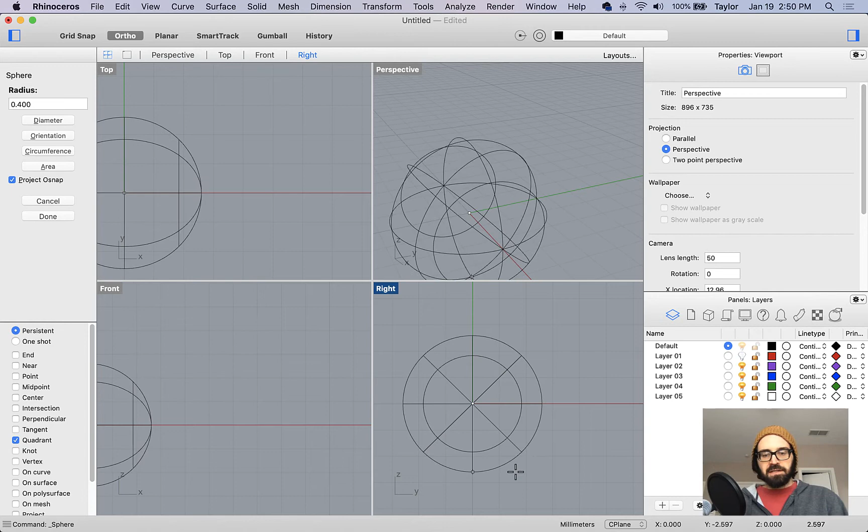Okay, so let's come in from the right-hand side. I will grab my sphere tool, sphere from the center and the radius, hit 0 to anchor myself there, and then we'll just make the duck yay big. So in this particular case, what really matters is proportion as opposed to specific numbers. I'll right-click to repeat the previous command and repeat the sphere. And then my second sphere will be about here, maybe a little bit smaller, kind of sticking out in front of the first one a little bit.

So if I look here from the top, I actually want these two to be in line. So they are in line here, but not in the right view. So maybe I should have made these in the right view. Oh no, that's correct. Okay, so now the duck is sort of facing up the green y-axis. Okay, back to Firefox. Okay, let's see here.

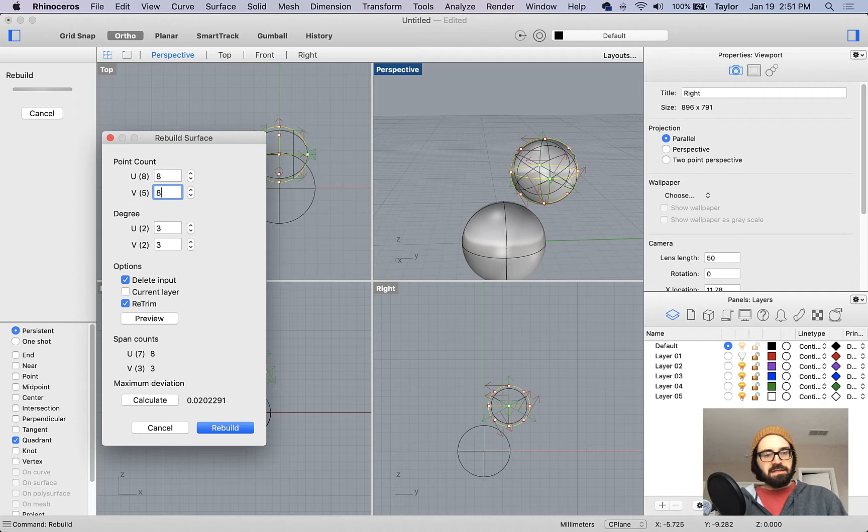Now, we're going to take these spheres and make them deformable through a process called rebuild. And it wants us to add in the degrees and make them 3 and 3 for the U and V. And the point count should be 8 and 8. So let's go ahead and do that. So rebuild. You might be able to do these both at once. We want this to be 8, 8, and 3 and 3. And then I'll say rebuild.

And now you can see there's more of these iso curves that are defining the shape of the sphere as compared to this one down here, which has fewer. I'll hit enter to repeat the previous command, and we like the settings as they are. So I'll go ahead and hit rebuild. And one of the things I want to verify here is that the direction of the rebuild looks the same. So you can see these circles radiating out from the center in the front viewport.

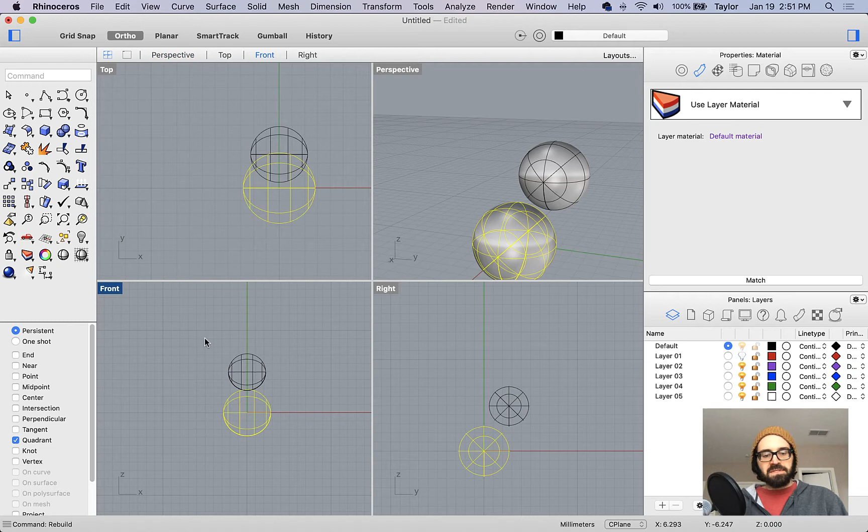And when I switch back to Rhino, my front is actually at an angle. So I could fix this if I wanted to by coming down on the top view and picking rotate, setting 0 as the axis of rotation, coming out here to the right, and then flopping this 90 degrees. It automatically went to 90, deleting the old one, because I had ortho selected. So I'm just making sure that my screen looks exactly like the tutorial screen, so now the front should look like this, and indeed the front looks like that. Or I could have just paid attention and set it up correctly the first time.

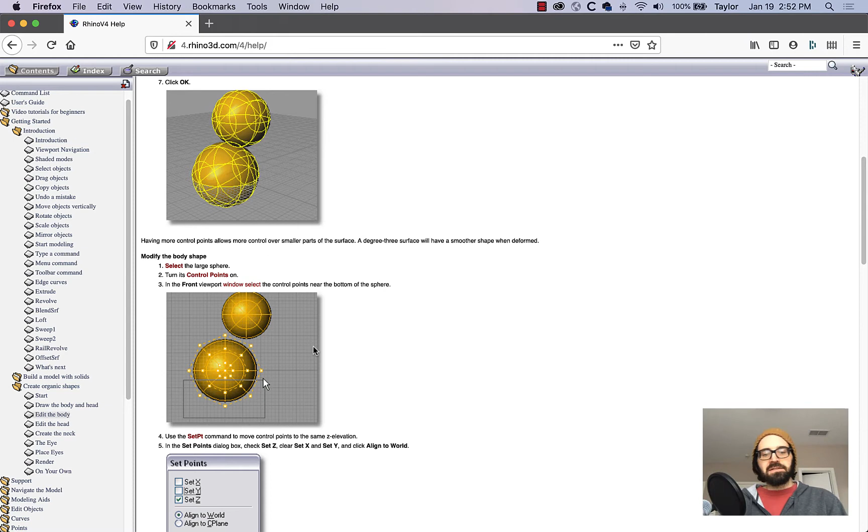Okay, now to modify the body shape, we want to reveal the control points that are making up this sphere. So think about control points kind of like little planets that are exerting gravitational force on an object, and as you move those planets further away, they pull the shape into a kind of distortion, and as you move them closer, they can dimple or indent that shape. They're also having us drag a selection box of these points from left to right along the bottom.

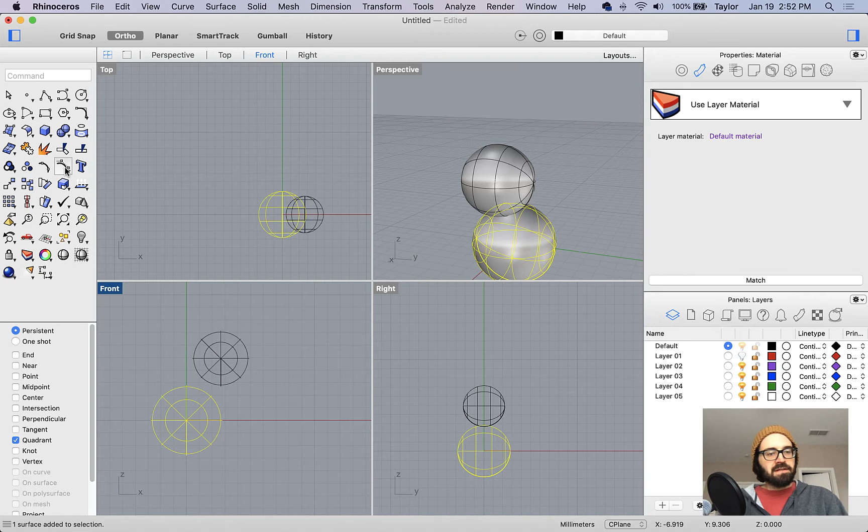So let's see, control points on. Let's go do that first. So I can start typing in control points. I might just do this with a button. Let's use this one right here. So this is control points on. And then I will select all of these right here. So you'll see it's the 6 that are at the bottom, and I'm not touching that central area with those points. Okay, so I get those. And then if I look in from the side, I can see that I selected some control points all the way across that were hidden from my view when I selected in the front view.

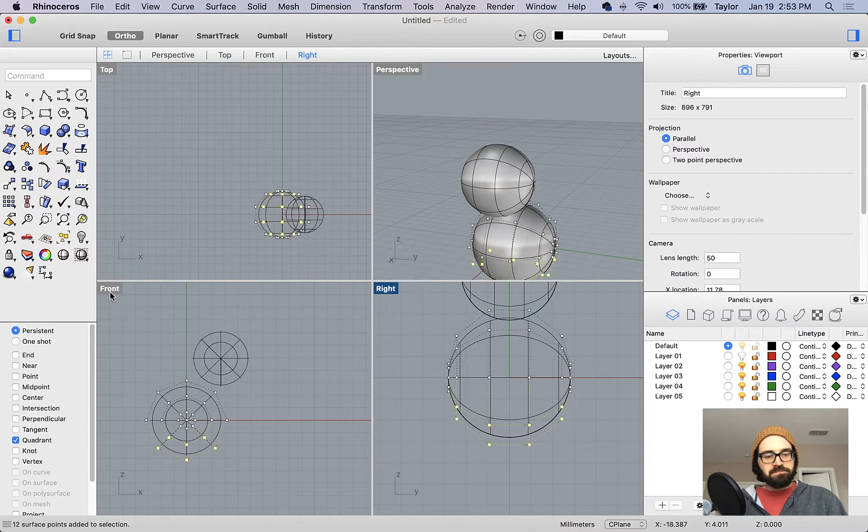Okay, now it has us doing the set point command, and we want to set Z and align to world. So let's try that out. Front view, SetPt. We're just worried about moving in Z, align to world. And now I can kind of move these up and down until I flatten my duck's body out. Maybe I'll turn on grid snap for this.

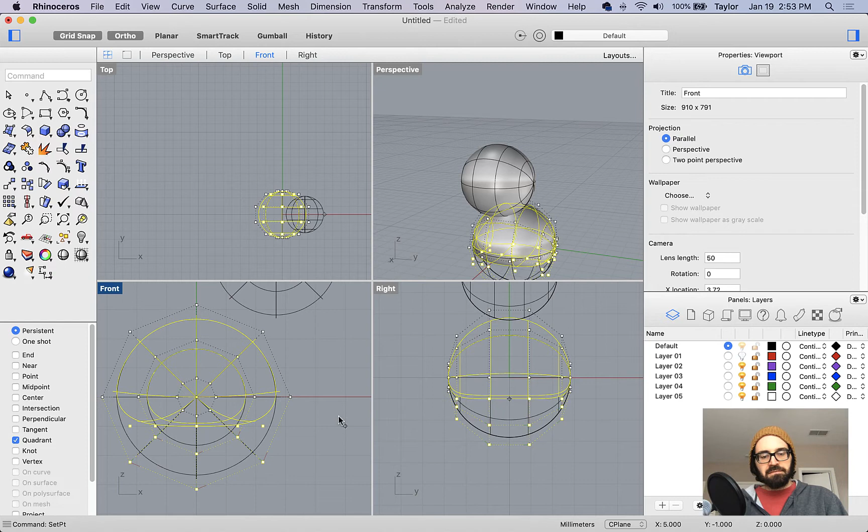So going all the way up to 0 is a little bit too much. You see I get these weird deformations, so I might do something more like that. Okay, so that gives us a little kind of flat but not too distorted and weird looking bottom for our duck to sit on.

Okay, now it's having us come in and drag the tail out. So let's come in again from the side. And sometimes this will take a little bit of experimentation, so maybe I can try selecting these 2 points all the way through and just dragging those around with my mouse. I'll need to turn ortho off for this so I have a little bit more freedom. So maybe I want that tail to be sort of up at a jaunty angle.

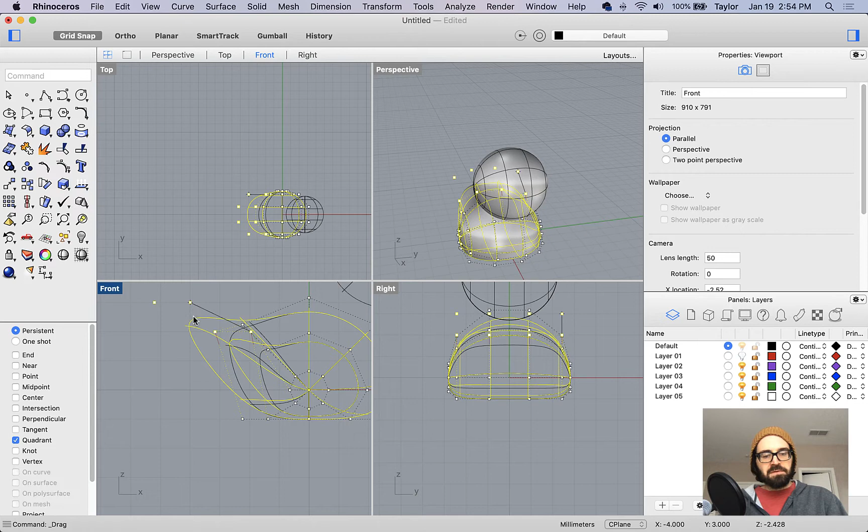And as I rotate around the duck, I can see if I'm causing any weird pinches or other structures like that. And that's looking pretty good to me. You know, maybe I would come in and individually move points around if I don't want this thing to be so symmetrical, but I'm going to stick to symmetrical for right now.

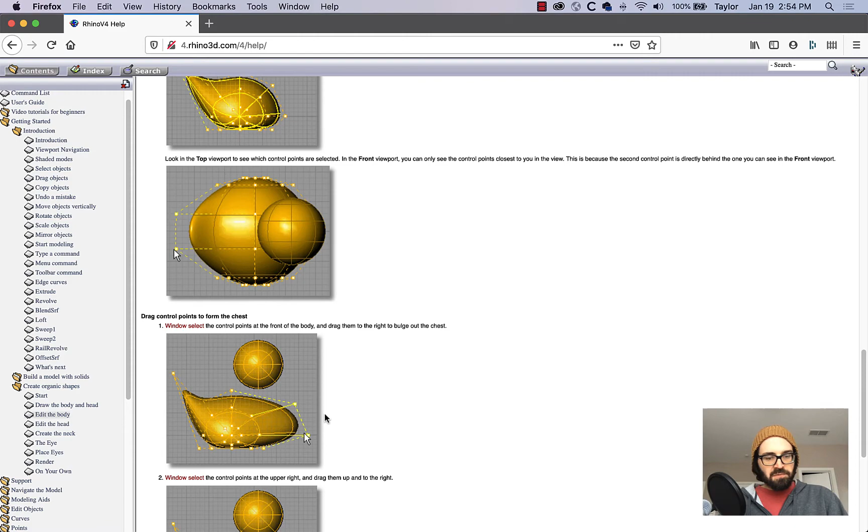Okay, drag the control points for the chest, so we're getting the chest kind of rounded out, making this guy a little more boxy. So let's come in here and say, maybe I'll select this group and kind of pull this out like that. Yeah, I think that looks pretty good. So I'm coming in from the side and looking around.

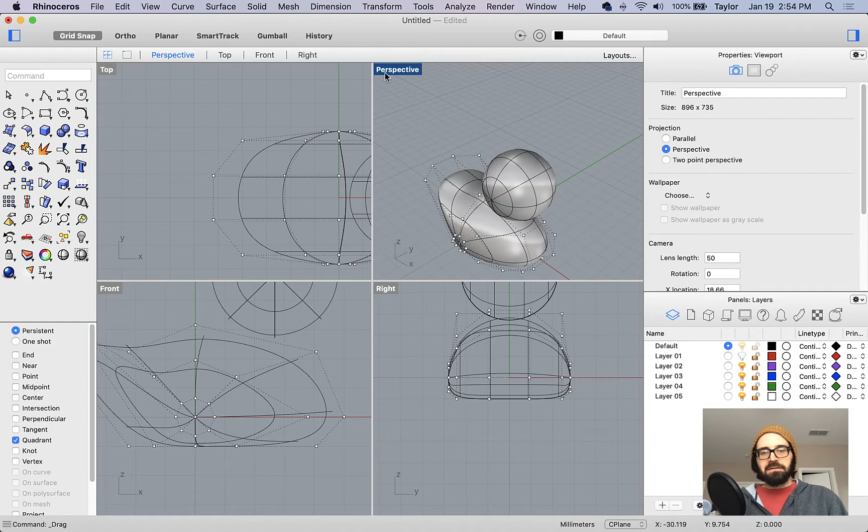Sometimes the shaded viewport can make it a little hard to tell what's going on, so you could switch this over to rendered, which is also a little bit hard to read, but I think that's actually pretty good for showing us what's happening. Okay, so our duck is taking shape. And then it says press the escape key repeatedly until the points turn off. Sometimes you have to do it more than once.

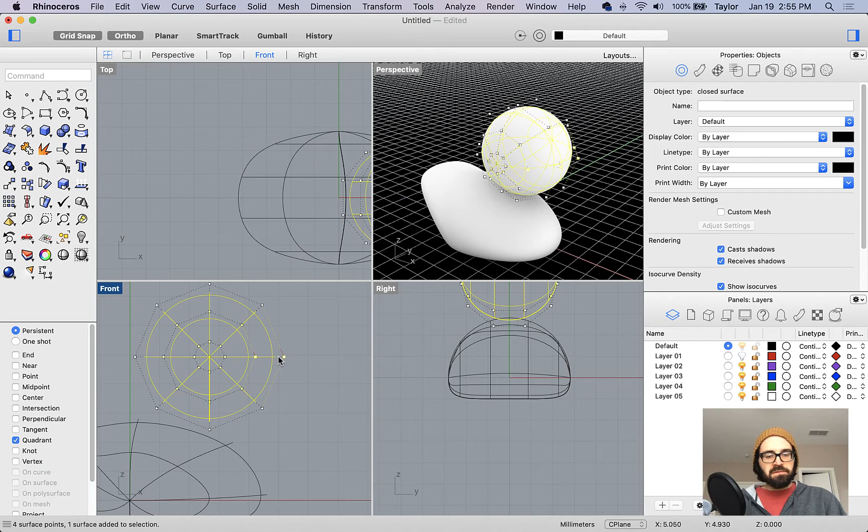Okay, next up. Now we're going to make the beak, kind of the same thing as before. So I select this circle, I turn on my points right here. I'm just going to pick a couple to pull straight out, so I might want to turn ortho on to help me with that, and have my duck's face look something like this.

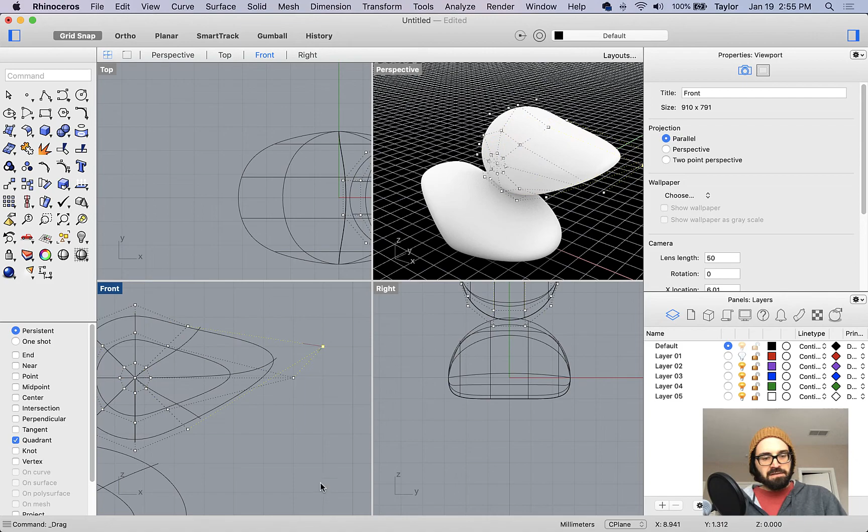It also has it pull up at a little bit of an angle, so now I'll turn ortho off and maybe just pull it up like that, or for example I could just reselect just the front points, so I can make this a little more articulated. Good. So, you know, we're making stuff on the computer, we want to make sure it doesn't look too digitized and too regular. Do something like that.

All right, cool. So now we start getting in here to separate our features out. We're going to separate the bill, or I guess what I was calling the beak, from the head. We'll start doing that by creating an interpolate point curve. So up here, I think that's a control point curve. So if I open up the menu, I get interpolate points.

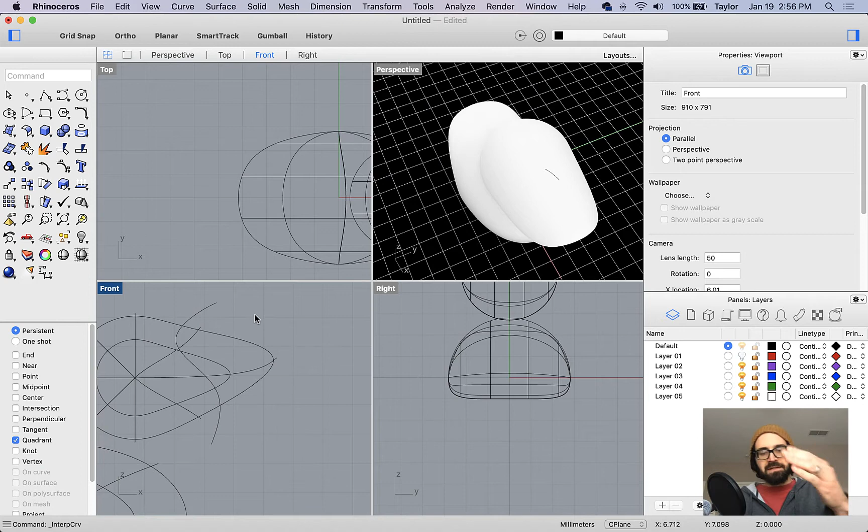And what interpolate points is going to do, I'll turn off grid snap as well, is I just sort of click around and then I get a line that's going to try to adopt. It's going to be like a bendy piece of wood that's trying to hit each of those points as it goes. Although I think the shape that we want is actually kind of the opposite of what I just made.

So let's see here. I'll delete that, redo the interpolate points command, and it kind of comes in and then goes out at the bottom. Okay, cool. So we'll do something like this. And, you know, this may take some experimentation to get this right, so I'm just going to do it however it goes, and then you can take the time to make yours absolutely perfect.

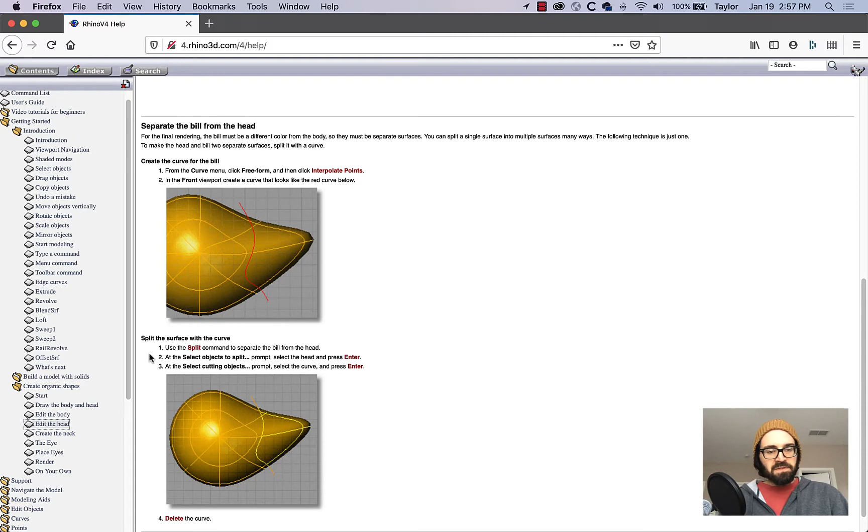Okay, we want to split the surface with the curve. So there's trim and split. Trim will delete one of the sides, whereas split just breaks something in half. So let's type in split. Objects to split are the head. Cutting objects are the line.

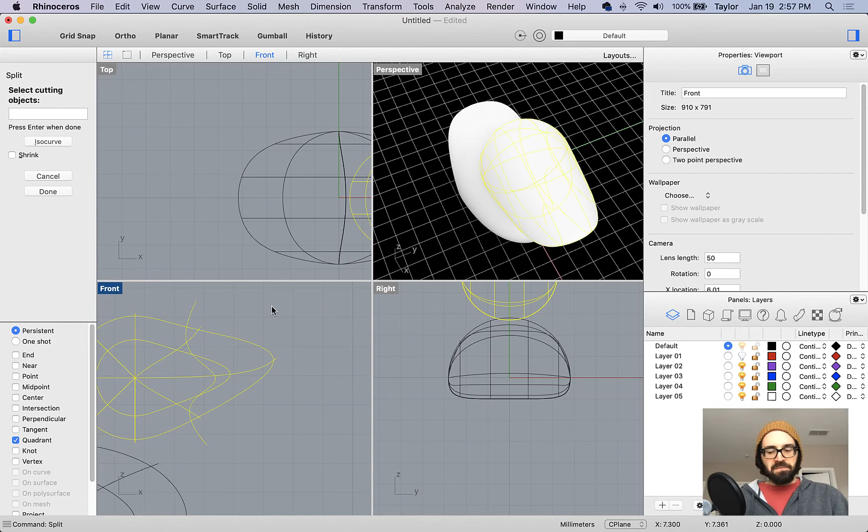And because I'm in the front view, it's understood that the line is going to project all the way through the beak, even though it's just like a piece of string. And I'll hit enter, and down here at the bottom I see split into 2 pieces. And I should be able to select these individually at this point. Cool. Now, if you don't like how your shape looks, take the time to go back and make it look better, but I'm going to stick with that one for now because this is just a demo.

Okay, next up. Now we want to model the neck, so this will involve, if I'm not mistaken, doing a trim, which I mentioned a moment ago, and we'll do that with a cut plane.

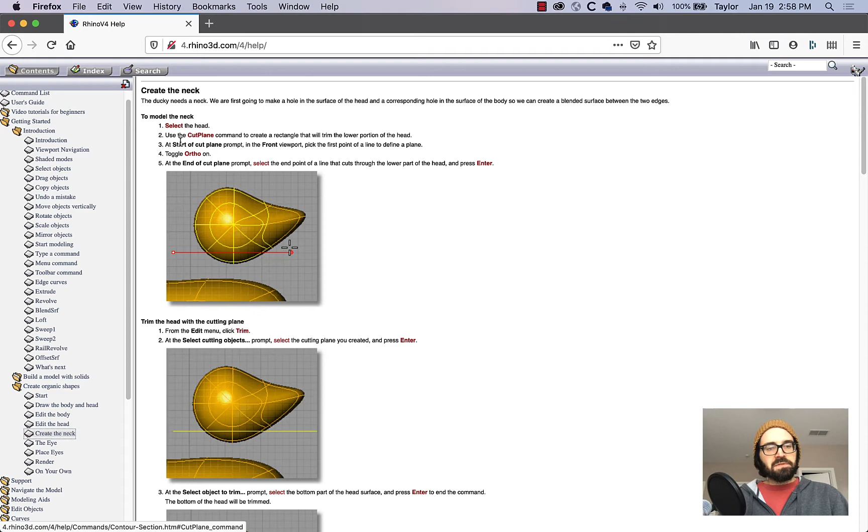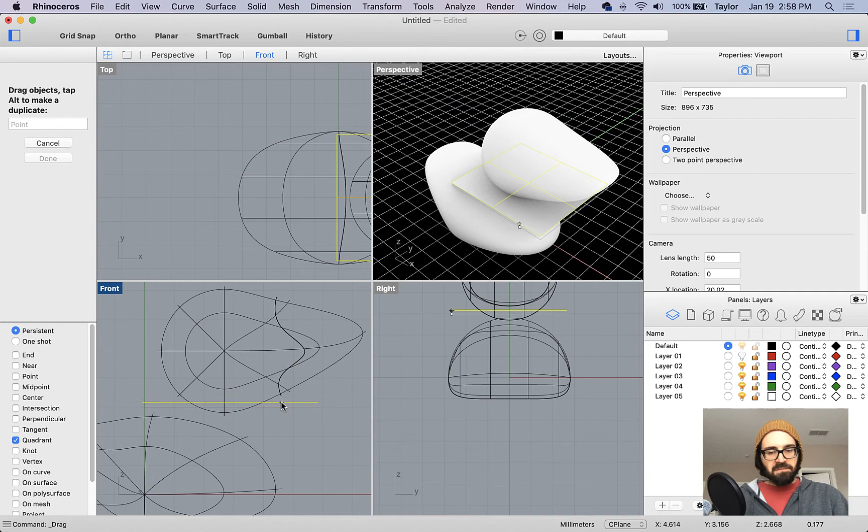Okay, so come in through the front, type in cut plane, and we're going to make a straight line across the bottom. I'm just holding down shift, but you can do this with ortho as well, and that will automatically make a plane that's the right size to accomplish this cut. And hit enter. I might scooch this up just a little bit, but I want to make sure it doesn't impact the place where the beak is separated from the head. So I get something like that.

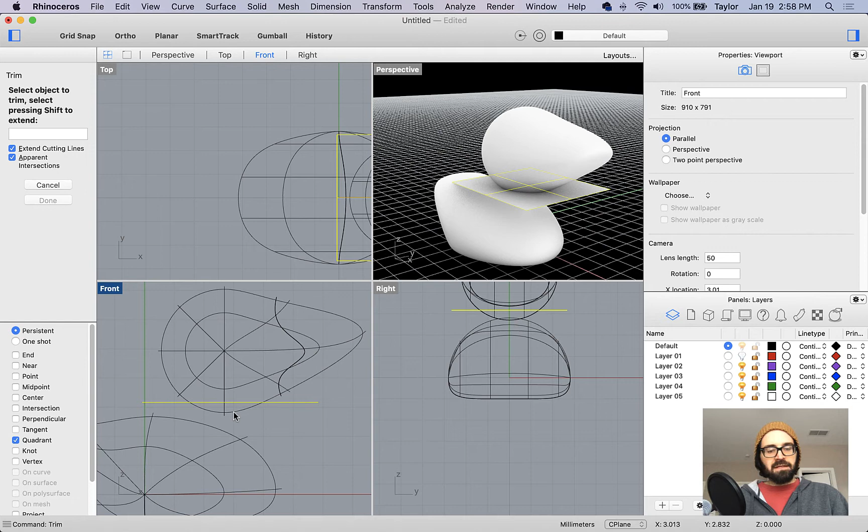Okay, we head back to here, and then we see we're going to select trim and use trim to lop off the bottom of the head. Type in trim. My cutting object is my cutting plane, and then right click or enter, and then this is the part to be cut. Now sometimes when you do this, because of the way that the sphere is broken up into parts, you have to do it more than once.

So you want to make sure to delete all of that extra geometry so that nothing falls beneath that cutting plane, and hit enter, and then I can just get rid of my cutting plane as well. So now I've kind of popped a hole in the bottom of this thing. Okay, so I don't know if it'll say this in the tutorial, but I think I might also move this duck head back a little bit. Yeah, so it's more solidly over the body.

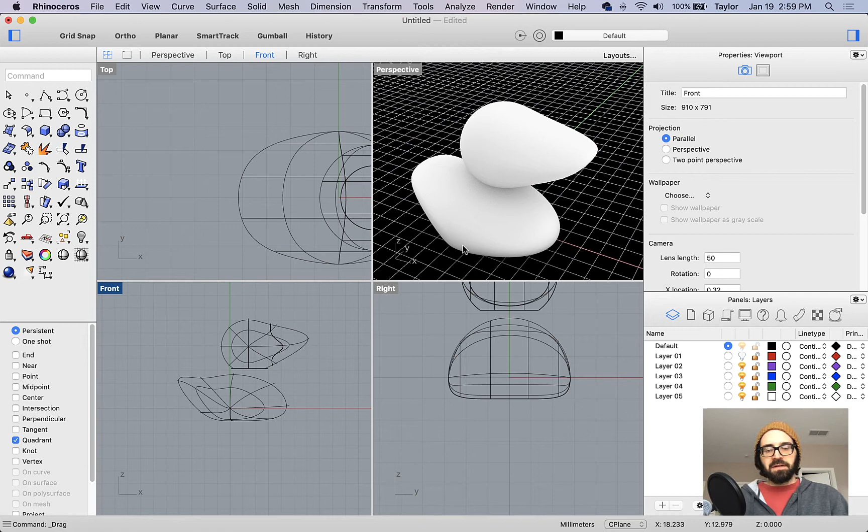Okay, cool. Now we're going to cut a hole in the body for the neck, and we'll do this with this command ExtrudeCrv, or extrude curve. And this one can get a little tricky. Here I might switch back to shaded to see what we're doing, because we need to extrude all of this curve at once as opposed to just part of it. And because the head didn't want to cut all in one piece, it's more likely to generate multiple pieces.

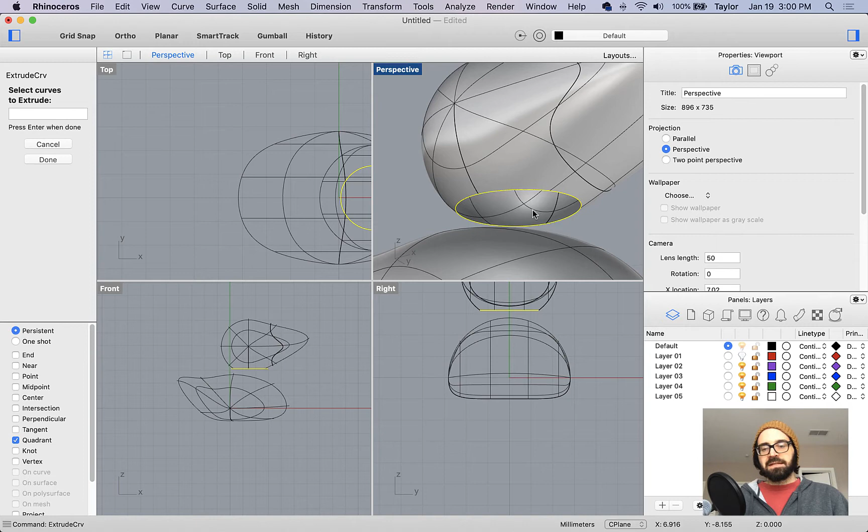So ExtrudeCrv, and when I select the curves to extrude, you see it doesn't want to give me the full neck unless I go in there and really tell it you have to do both lines. And then I hit enter or right click the mouse, and then I'll extrude that well into the body, so I'm absolutely sure that it is coming into contact all the way around its perimeter with the body. Okay, so there we go.

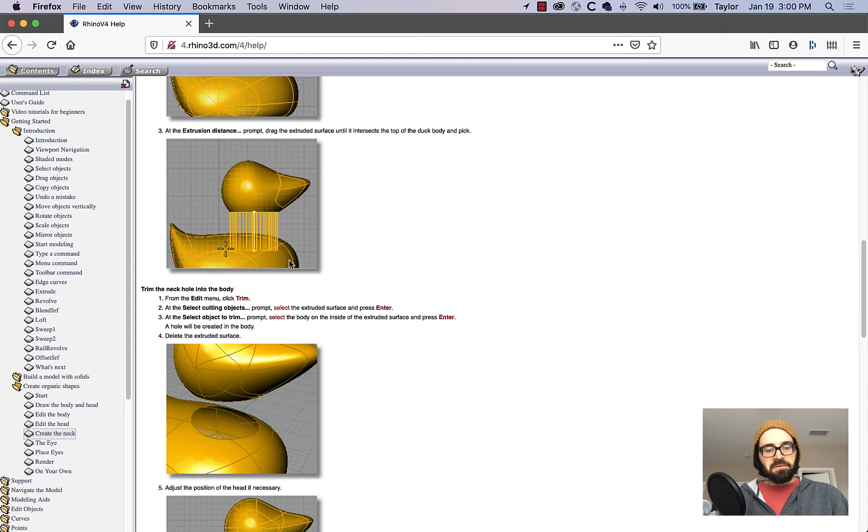We got our extrusion. Now we go back and we do another trim, and this time we will use the neck to trim a hole in the body. This can also get a little bit weird because you might have to do it more than once. So I'll switch over to ghosted view, which might help, and then I'll say trim. Actually, I like the front view for this. So the cutting object is the neck, and then the object to be cut is the body.

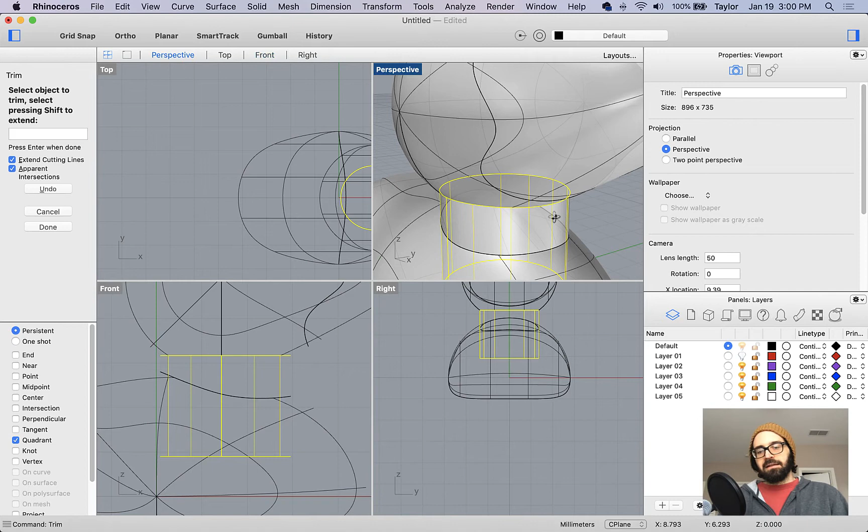And that time I got lucky, so you can see that that cut runs all the way through, and so I didn't have to do it in two pieces. So I can hit enter to finish the command, and then we're going to get rid of that extruded neck because it's too rigid, you know, it's too computery looking. We want to have more of a blended neck.

But at this point you should note that we've been working with solids up until now, but once we cut a hole in a solid, it essentially reduced it to a series of surfaces that have absolutely no physical matter. So this would not be a 3D printable object, and this will become very important later. We always need to restore surfaces to solid objects in order to have the most flexibility when working with them.

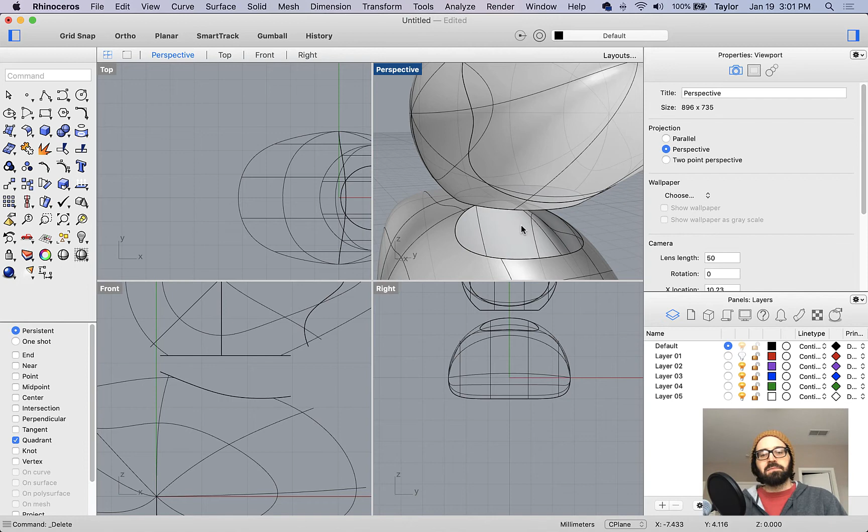Okay, let's see. So now we're going to make the duck's neck, and we're going to use blend surf, or BlendSrf.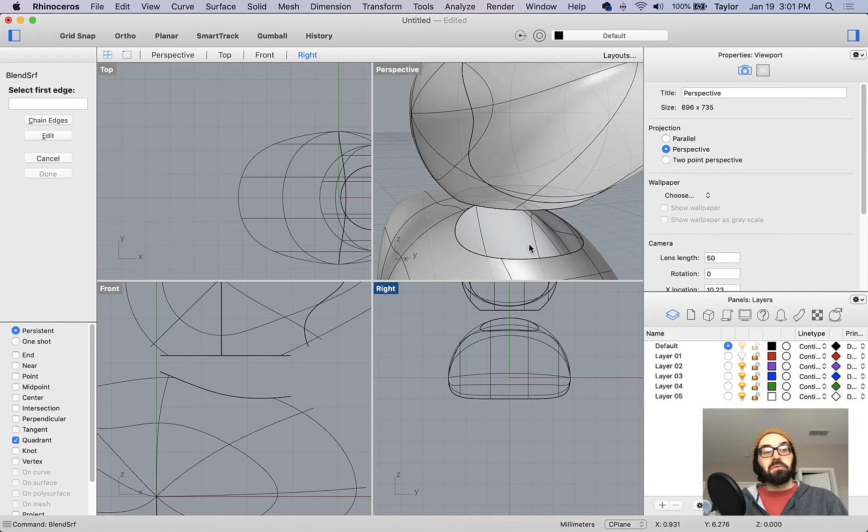In BlendSrf, you'll notice as I'm entering these commands, I'm constantly changing my view and rotating it to make the clearest indication to the computer what I want. So the first edge in this case is going to be the lower neck. That one selects in one piece. That's great, and it understands that now we're moving right on to the second edge.

So I'll click here, but I'll need to click twice. Oh, it's having some trouble with that. I might need to start on the top. So I'll hit cancel, enter to repeat the command.

Okay, so select first edge. I'm going to check chain edges so that it understands that the edges I've selected, one right after the other, are still part of part one. Okay, now I hit enter. Oh man, see, sometimes you've got to do these a couple times to really figure it out.

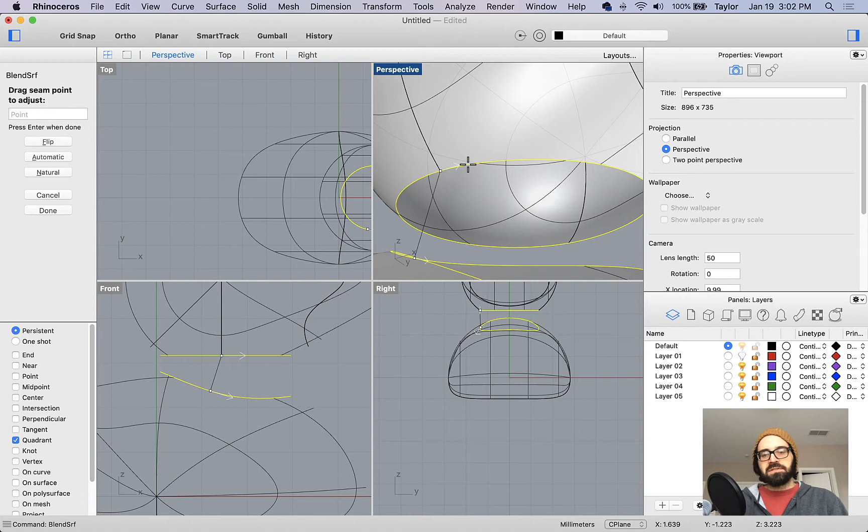Okay, first edge, chain edges is checked. 1, 2. Now it's understanding that we need to move on to the second edge, so I'll click down here. And then it gives me a sense of the direction you want these lines to be moving in, and if they're not, you can drag those arrows around. So now I'll hit enter.

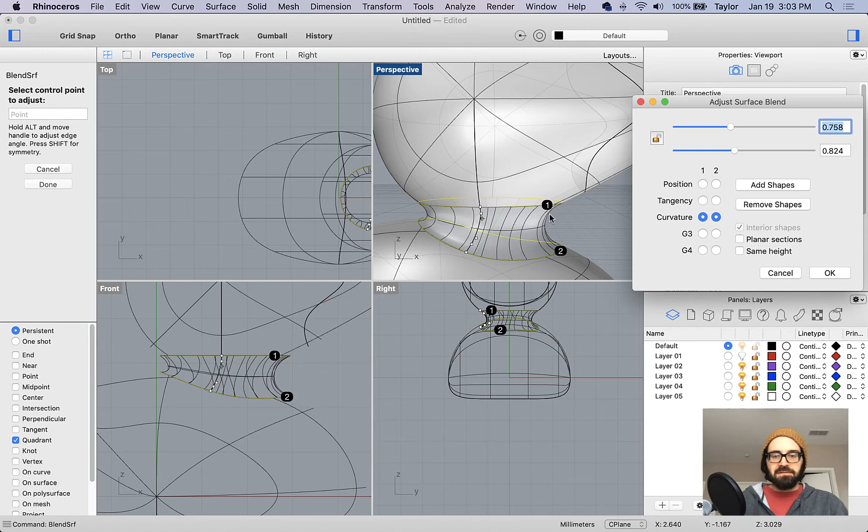If I move this window open, now you can see my blend starting to take place. The computer is interpolating where the surface was heading from the top, where it was heading from the bottom, and then blends them together. You can mess around with all these and make the different features more or less aggressive. I'm going to leave it pretty much at the default. Let's take another spin around. That's looking pretty good, so I'll hit OK.

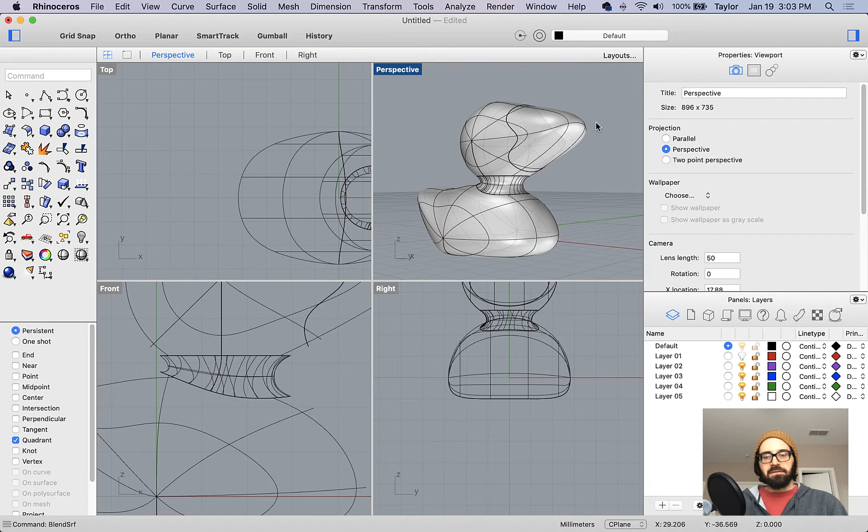So you see pretty quickly we're just starting off with two spheres, and already we have a fairly recognizable object that doesn't just look like it fell right out of a computer. I mean, it kind of does. So there's our blend, and then finally at the end it says use the join command to join together all three parts. So I select everything and say join. And if I don't get an error at the bottom, here's what you always love to see: 3 surfaces or polysurfaces joined into one closed polysurface. Closed polysurfaces are generally the thing we're trying to arrive at for the most flexibility.

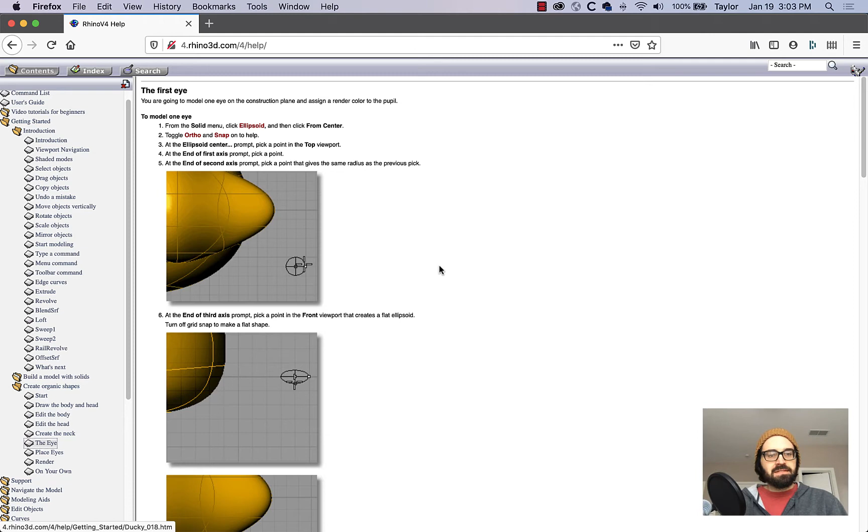Okay, now here's one that always trips up my students, so let's jump in. We're going to make an ellipsoid, and this is going to be the eyeball of the duck. We're going to do this in the top view. So I'm going to pick, instead of sphere, ellipsoid, and from center, I might put on grid snap just for kicks.

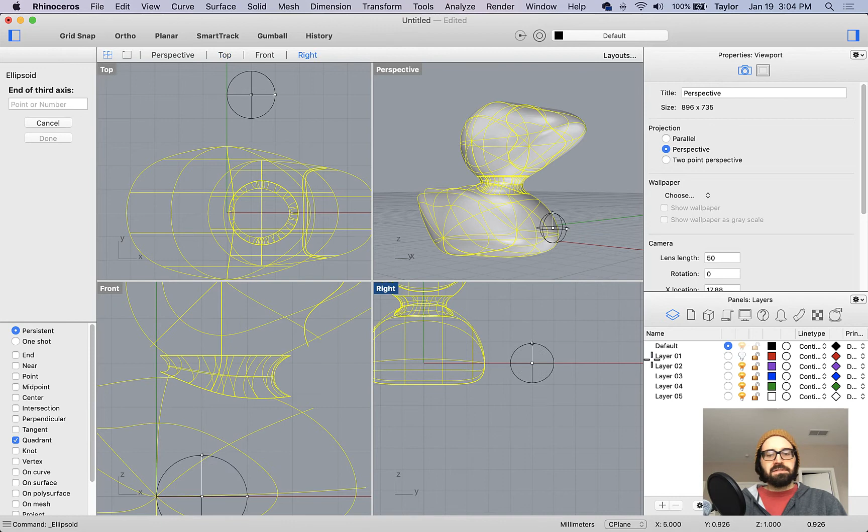So I've established its center, and then I make one dimension and the second dimension, and those should both be equal. So from the top, this thing needs to look like a circle, but then from the side we're going to kind of squash it. So I'll turn off grid snap, and I can get something like that.

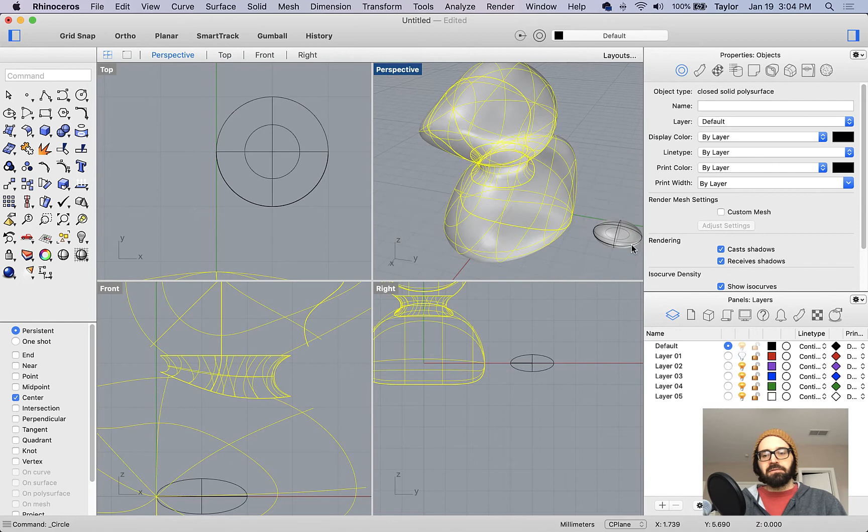So there's my eyeball. Okay, next up we want to make a pupil on that eyeball. So I will grab my center O-snap, find the edge, and then you can just kind of do this visually depending on how big you think you want that eyeball to look. So that's just a line, which we call a curve in Rhino. And now I will say split, although I may have to project it onto that surface. So the cutting object is this guy.

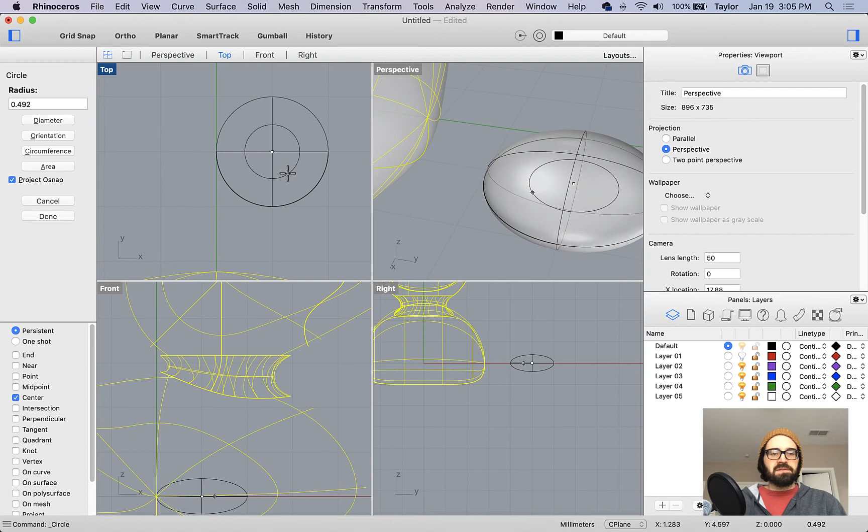Yeah, I will have to project it. Okay, let me back up and do that a different way. So I've got my ellipsoid down here on the ground. I'm going to add a circle using my center O-snap. This will be the pupil of the eye.

And then I'll take that pupil line and I'll say project. I select the surfaces to project onto, and if you watch carefully in the perspective view, you can see that now that flat circle has been projected all the way up onto the top and bottom surfaces of the eyeball. And we really just need one, so we can just delete the other two.

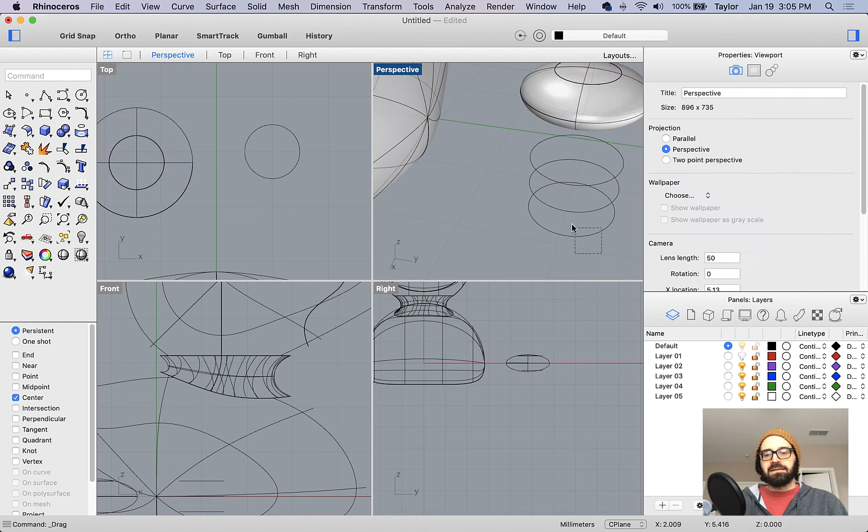Because now when I say split, I can say the object to split is the ellipsoid, and then the splitting object is the curve. And now I've got two nice surfaces here that I can render as different colors. In fact, I'll shift select them, move them off to the side, and then delete these lines right here because I don't need them right now.

Okay, so now I take this thing and group it together. We've gone ahead a bit in the instructions, so we already did our pupil. Now it's time to add in some colors. We covered this in the flashlight tutorial, but let's talk about it again real quick. Let me ungroup this.

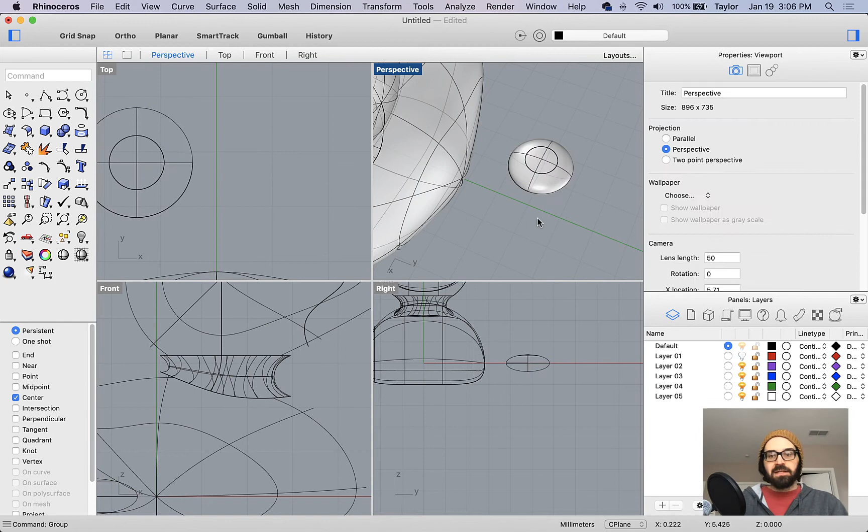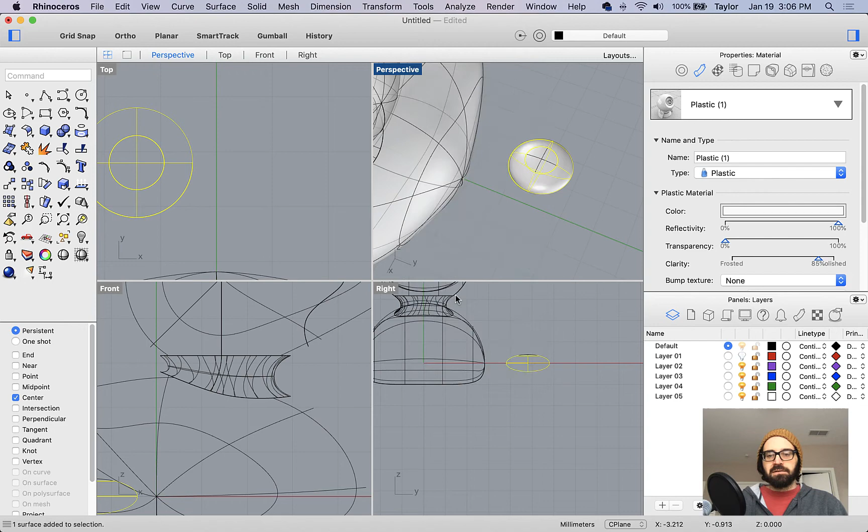I'll select one of the objects and grab its material. This may look a little different on PC, but you should be able to find it. We want to make a new material. I happen to have a white plastic already, so I'll go ahead and pick that. If I switch over to rendered, everything looks like it's being rendered in white right now.

Now let's grab the pupil and make a new black material for that. Let's call it plastic, and we'll make the color black. You can mess around with reflectivity and transparency and stuff all you want. But now we have an eyeball to mess around with, so I can regroup this.

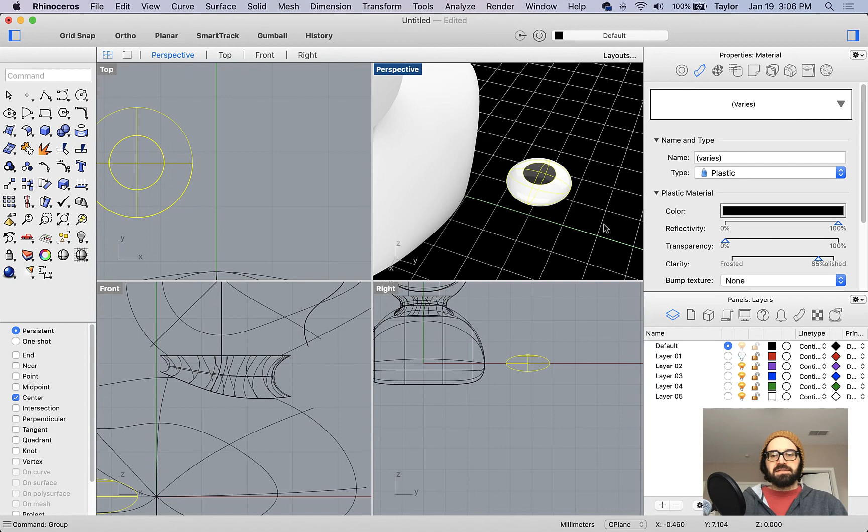You could make the duck whatever color you want. I'm actually going to explode it at this point, rendering it back into individual surfaces because I want to make some of these surfaces different colors. So I'll join back together the body, and now my beak and my body are separate. So let's make...

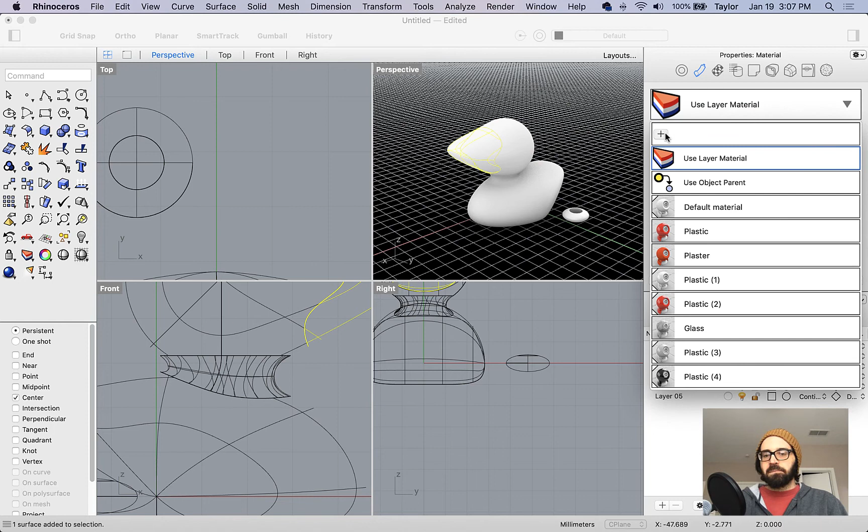Say a plastic that is orange for the beak. It's kind of nice to see it update live like that. And then you can also take a look and see, do you like how that beak is laid out? I think it looks pretty good. It's kind of a strange shape. You might make yours a little different.

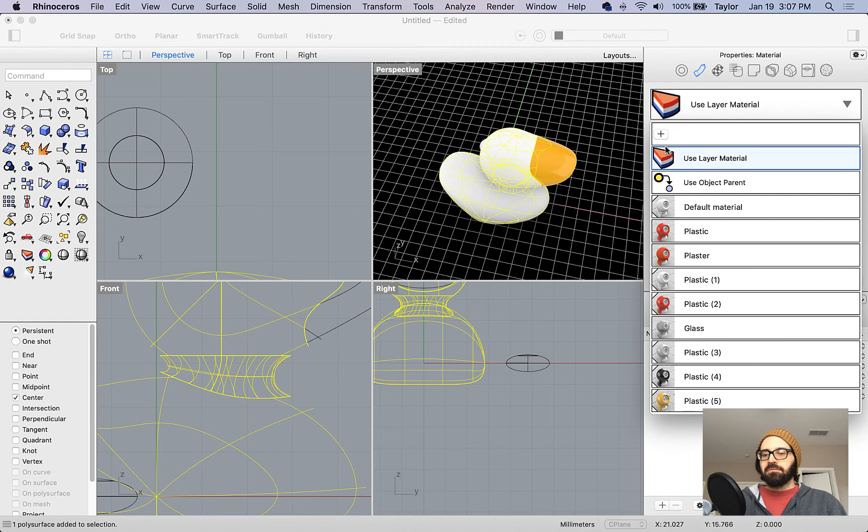And finally, we'll make one more material for plastic, and we will make that duck yellow. So again, we're going to get into some really cool, funky stuff in V-Ray that's going to let us go absolutely bananas on the rendering front. But this is just how to do some basic stuff so it doesn't just look like a stock image. That's a very shiny duck.

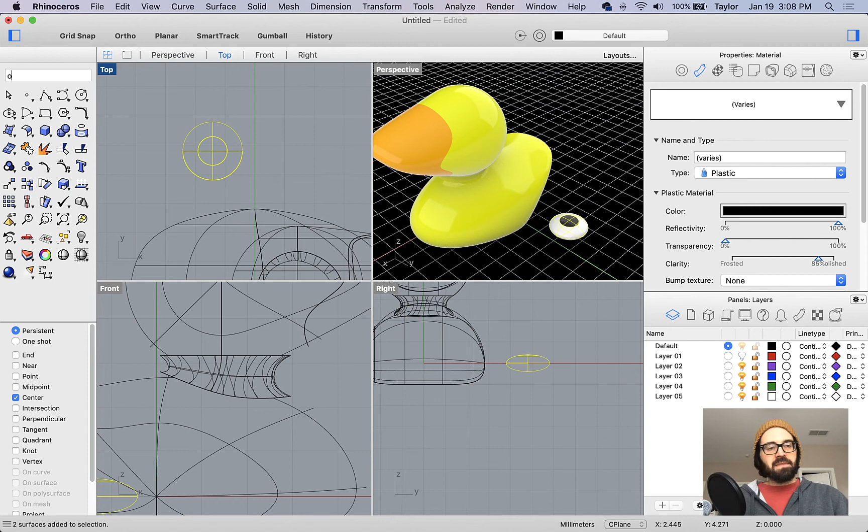Okay, so here's an interesting one. We have to figure out how to get this eyeball oriented on the surface, and this one seems to stump my students every time. Let's see if I can get it done the first time. I'm going to say orient on SRF, because we want that eyeball to land at a strange angle since the duck's head is no longer like a flashlight or something geometric.

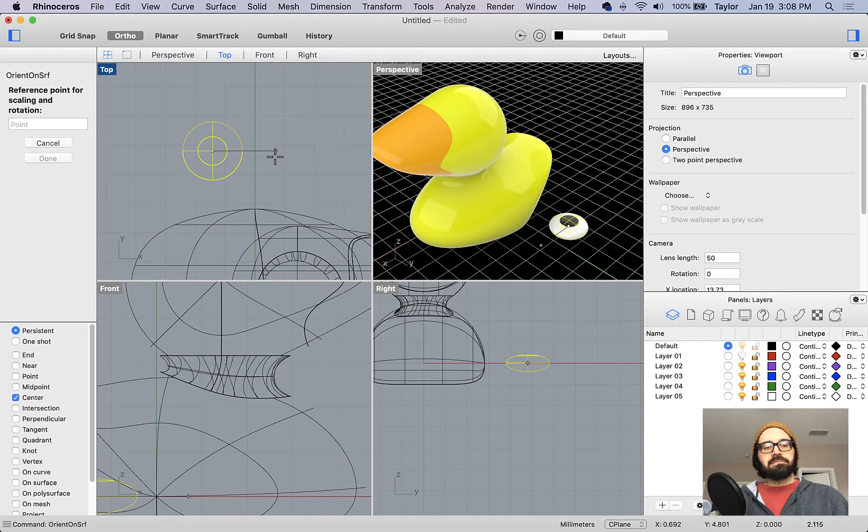The base point of orient on surface, assuming you've made your eyeball exactly as I have, is going to be the center while looking down in the top view. Then we just need to head out in any direction, really, because it's symmetrical. So I'll just check ortho and go off to the right. The surface to orient onto, I'll click on the duck's head, and it's going to ask some questions, and I'm just going to say that's fine.

And then now as I move this around, you can see that it is adopting a kind of realistic position on that head. So I don't have to do all this work rotating the thing in multiple directions to get it to stick to the head. If you wanted to, you could try to bury it a little deeper by putting your original orientation points in a slightly different place.

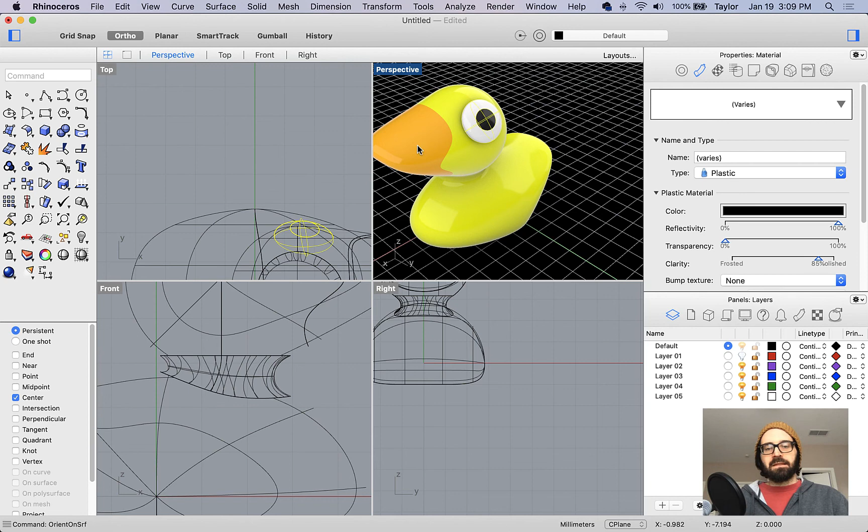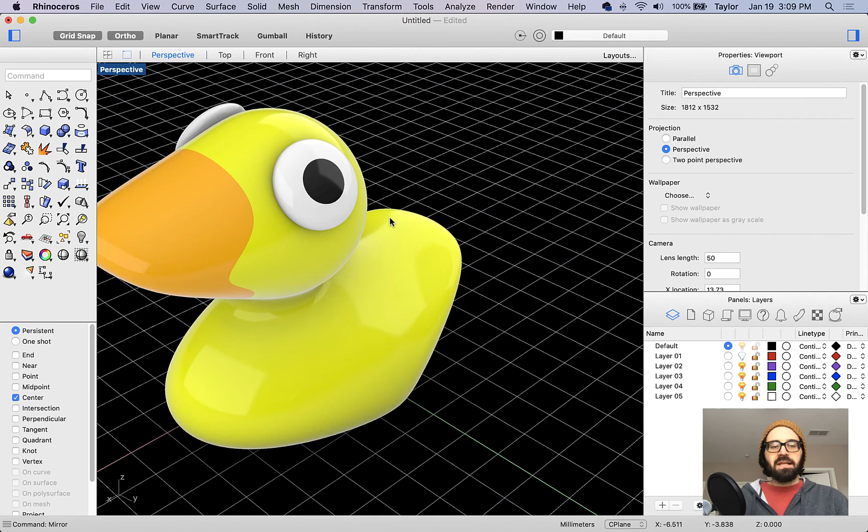But I'll go ahead and stick with this for now. Okay, and then finally I'll come up to the top and type in mirror, because I built this duck so the center is at 0 on the X and Y axis. The mirror plane, if I hit grid snap, is just starting at 0 and coming off to the right or left. I have copy checked, so I'll left click there again, and then I'll get a duck that looks something like this. I'm going to rotate around that guy.